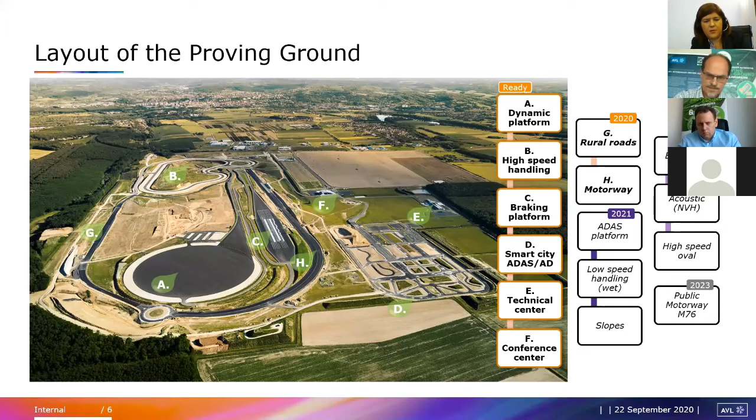This is also, I have to say, an older picture, newer than the other one. You can already see here in the field the ADAS surface, and more here the slopes. You can see more here within the high-speed handling, already the wet handling course, and also the bridge for crossing of the highways, also ready.

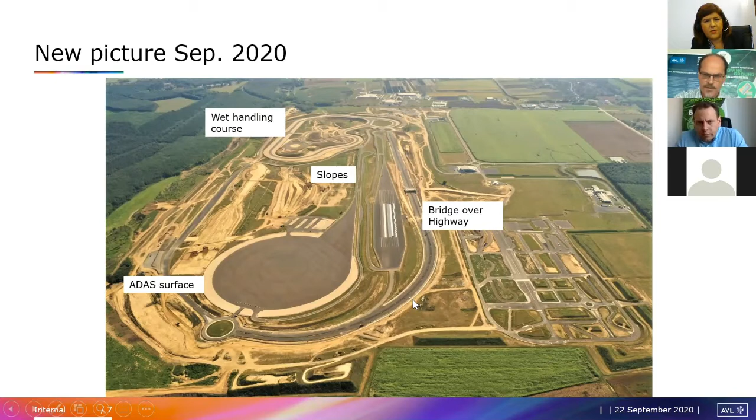Some more details, as I mentioned: the dynamic platform with 300 meter diameter, acceleration 760 meters. What is interesting on that platform is that on the return lane we have put some special markings, meaning you can make your real testing on the dynamic platform. If you still have some other testing to do, like lane keeping testing, you can do that on the normal return way, so you don't have to use a different module or section. You can do it within your test on the dynamic platform, going on the return lane, making lane keeping or lane changing and other testing as well.

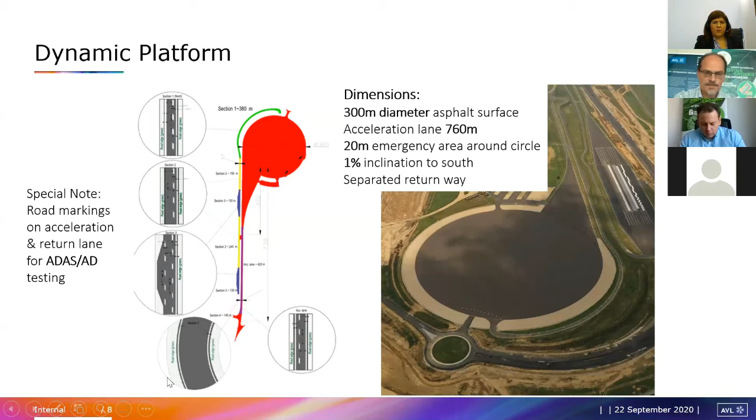This is the high-speed handling course, and you can see in the picture on the right side already the contours of the low-speed handling course as well. As I mentioned, 2 kilometers long, 2 kilometers and 40 meters to be exact, with a width of 12 meters, and on the right side 20 meters of gravel as a safety zone. Here you can also see the multi-lane section of 3 lanes, 450 meters long, also divided and marked with special markings.

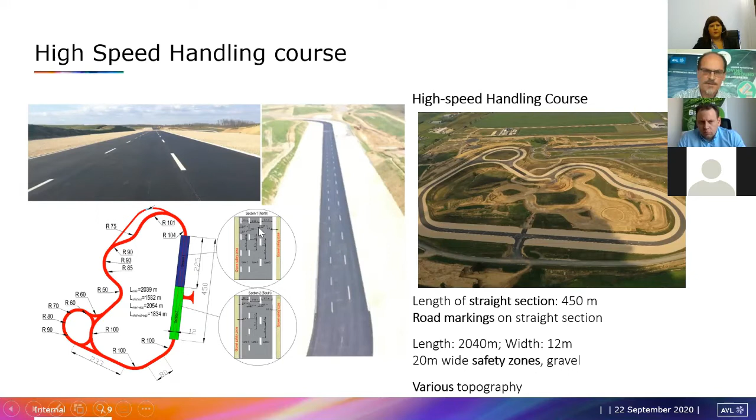Here's a marking of a motorway, and on the left side is a marking of a highway. This gives you a possibility to make platooning and other testing here on that module.

This is the brake measurement track. As I mentioned and you saw in the film, there are different surfaces, beginning with the chess surface, a normal asphalt with a mu of 1. Then we have the specialty of the low mu section built out of tiles, Japanese tiles, 10 by 10 centimeters, handmade, which gives a mu of 0.1, which is ice. Then next we have the blue basalt, which gives a mu of 0.3, also very close to ice. Then we have an asphalt mu 0.8 as a mu split, if you want to make some braking tests with a normal surface and the ice surface on different tires.

Then we have treated concrete of 0.6. We have another reserve surface still for mu split of 0.8, and on the right side we have our aquaplaning basin, which we can fill up to 5 centimeters with water. All of the surfaces have a length of 200 meters.

As I mentioned, 750 meters is the acceleration lane, and still at the end, if you cannot bring your car to stop, which in case of the low mu is very difficult, maybe for a passenger car they may stop the car. For commercial vehicles, buses and trucks, it's quite impossible if you have a speed up to 80 kilometers to stop on the 200 meters of the low mu surface. Therefore, we have at the end another 150 meters as a security zone.

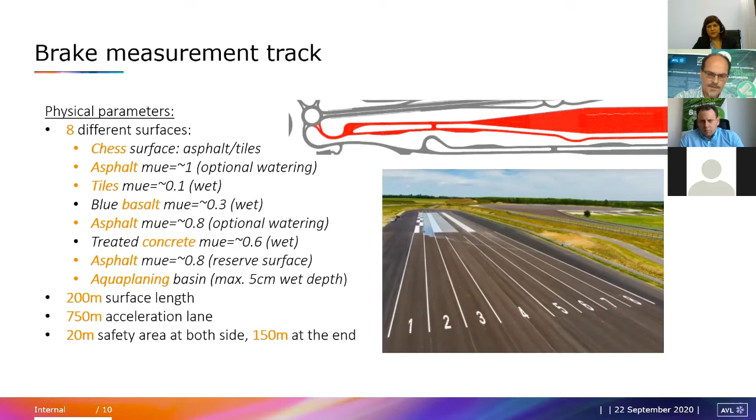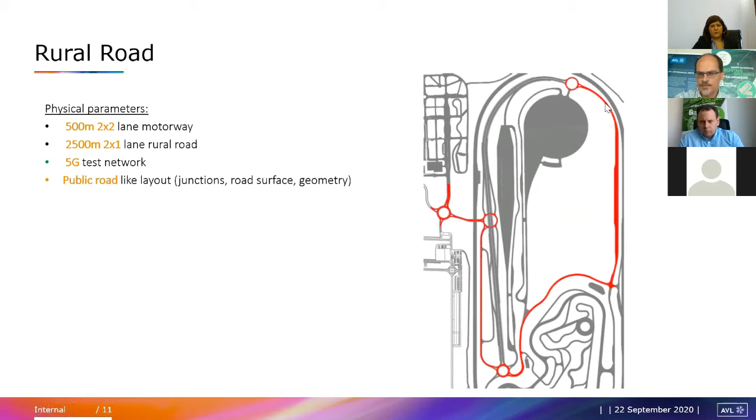This is, as I mentioned, our rural road system. It has two functions. One is to combine the modules, meaning if you come here from the technical building on the left side, crossing the motorway, you can decide to go on the motorway directly, or pass only the motorway and go to the modules like the high-speed handling course, the braking platform, or the dynamic platform, or use the rural road as a cycle course. So you can start here, go to the highway, go to the round corner, and get back on the rural road and have a circle of different scenarios.

This is our smart city, and as I mentioned, this is the biggest smart city in Europe. There is no other proving ground, no other smart city of that size in Europe. The next one is in Asia and in America. It's divided into 5 different sections.

The first section is the low speed parking area, where we really have some low speed tests with a parking area and a logistic yard. Then we have a multi-lane high-speed area, the second area. It's a 2 times 2 lanes section, where you can have within the city the high-speed test, which means up to 70 kilometers per hour.

Then we have our downtown area. It's section 3, where we will build, mid of next year, some building facades out of glass, stone, and iron, 10 meters high, as I mentioned. And then we have a suburban area with different road sections, with also a small hill inside.

And then we have the T-junction area. It's a normal outside-city area with very straight roads, with several functions also on the road itself, some parking areas, some bus stops direct or next by to the road, to simulate all the kinds of scenarios you may have in the city and outer city.

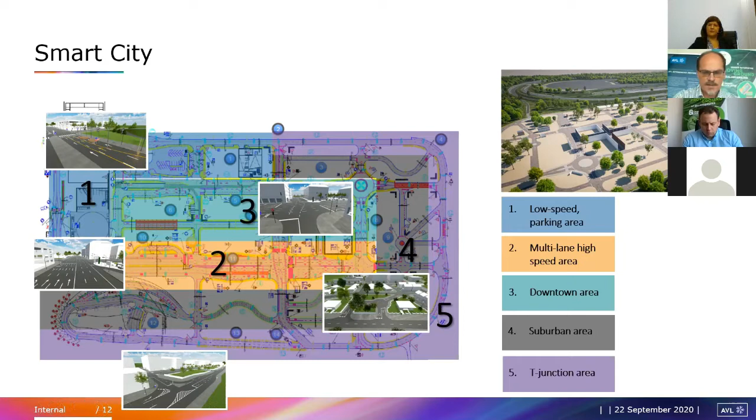That was the vision in 2014, and right now we are here. So once the buildings stand here in the downtown area, I think we will have quite the perfect copy of the vision.

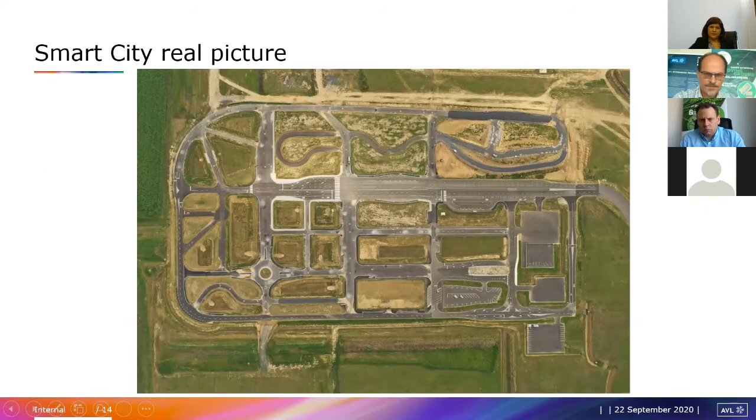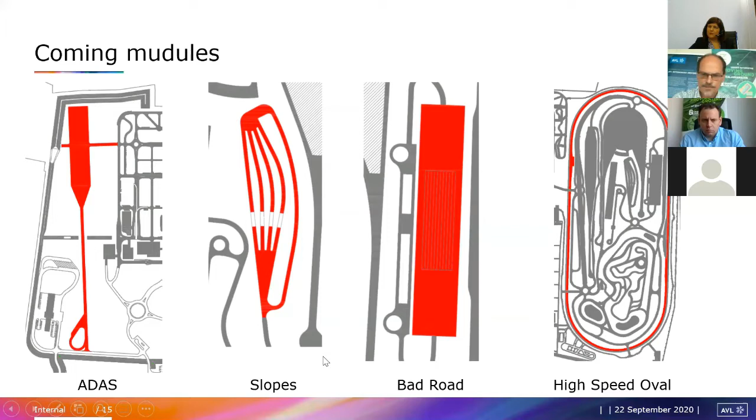You can move your real car in the smart city, and then input into the software that a bicycle is crossing the street, and the car will stop automatically. In real life, you will only see there is a car, there is no other target, and the car stops, because the software is simulating that a bicycle may be crossing the street, but you will not see it - the car will recognize that, and you can simulate that.

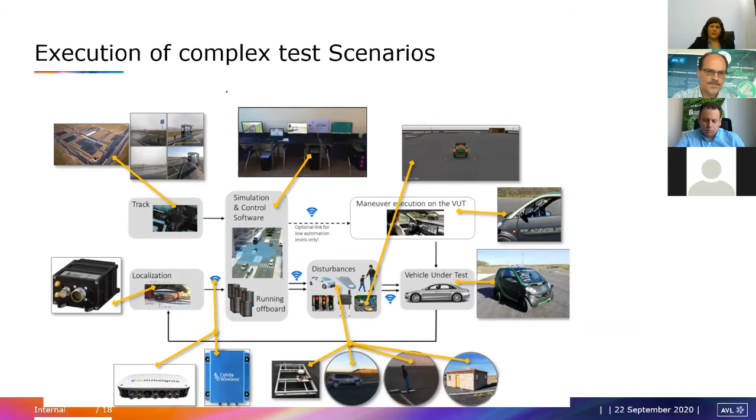These are the software we are using right now to handle all these scenarios and cases.

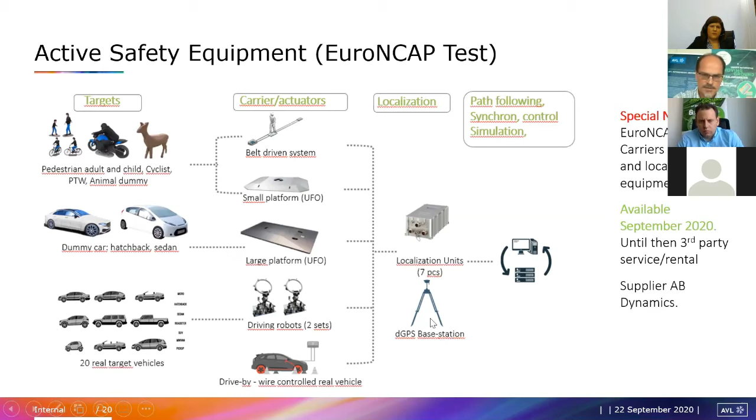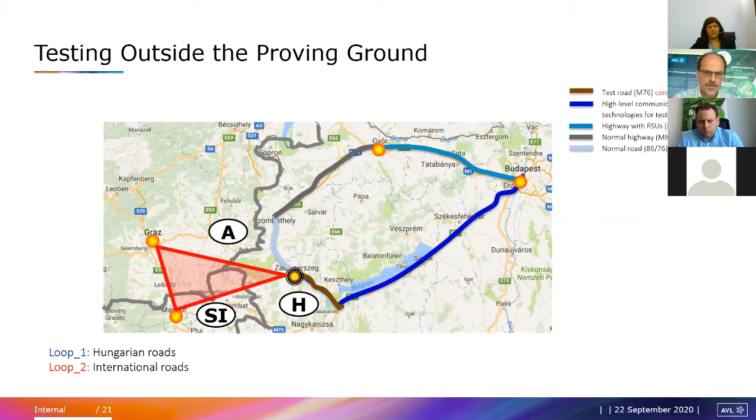As I mentioned, testing outside the proving ground is also possible. We have here a trilateral cooperation with Austria, Slovenia, and Hungary for autonomous driving crossing the border - what will happen within the car, the time crossing the border, when it will recognize the new systems, the new telecommunication, how the car will react, and is it able to react in time. It's also a topic Viktor can explain in more detail.

What I also said, we have the possibility in Hungary since April 2017 to make testing on our road network in Hungary, which means you can test your prototype cars and autonomous cars up to level 4 on the complete road network in Hungary without any time restriction, any territorial restriction. This means you can go within any city and on any street and make your level 4 testing.

For sure, there were some requirements you have to fulfill. Once they are fulfilled, you can have this permission and can go and test on the total road network.

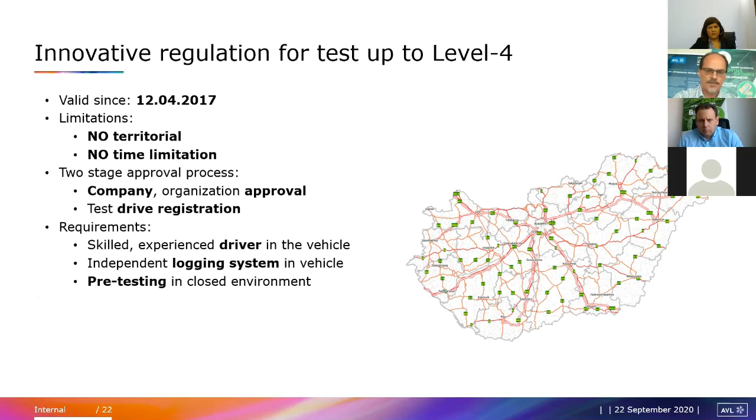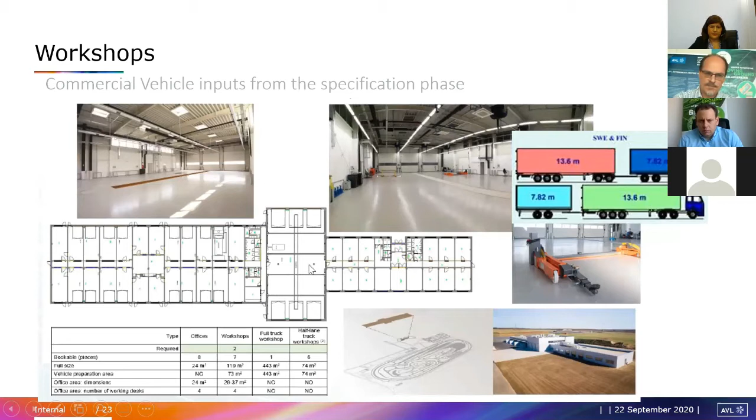These are our workshops. Also already seen in the film, we have 8 workshops for passenger cars. One workshop can fit up to 2 passenger cars with a separate office next by, with space for 6 to 8 people. We have the big garage workshop for our trucks and buses, and we have some offices which we can also provide to our customers.

As we are not only a proving ground for passenger cars, we also have the possibilities to let in here commercial vehicles, which means trucks, buses, and that kind of categories.

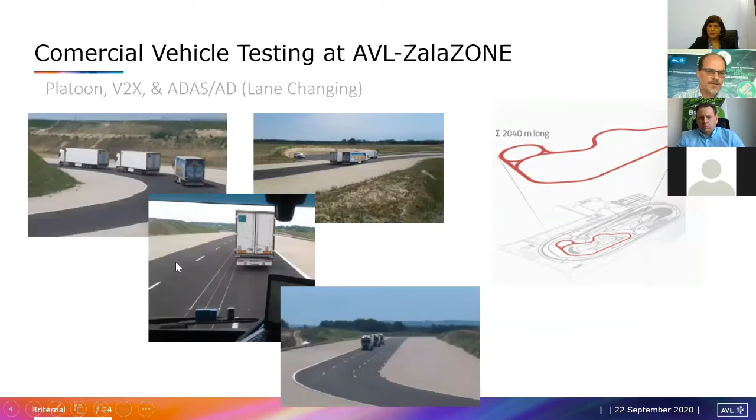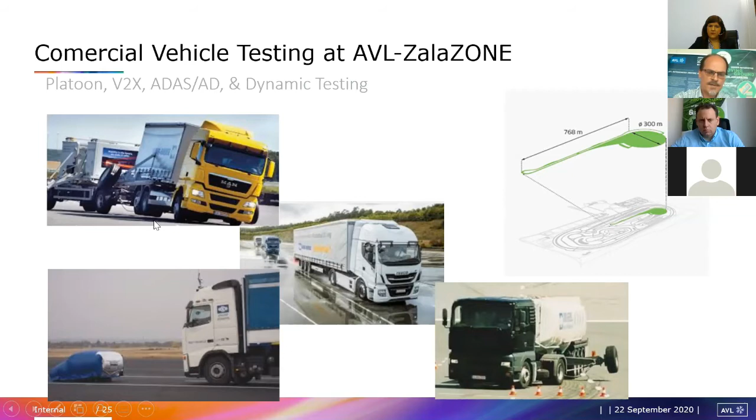This is an example of what can be tested on the high-speed handling course, because even though it's for high-speed, it also fits commercial vehicles for platooning and lane changing scenarios. The dynamic platform is also very specialized for commercial vehicles to do platooning and some dynamic testing, and some other testing as well.

Also in the smart city, as we have a logistic yard, we have the possibility for autonomous driving commercial vehicles to test. As you saw also in the vehicle for some ADAS testing, it means pedestrians crossing the streets and the system has to react, or normal parking situations for autonomous commercial vehicles as well.

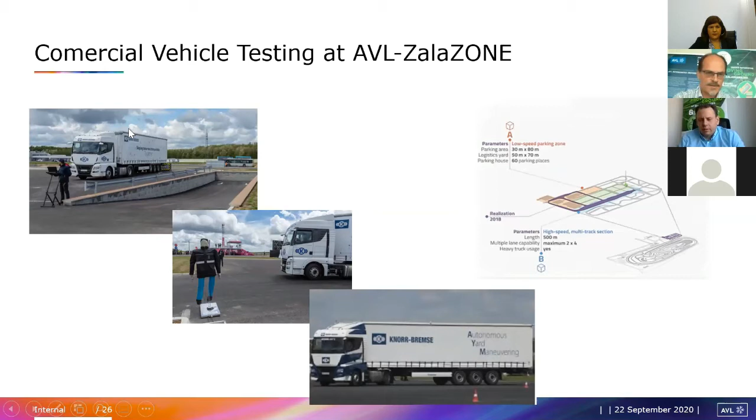Then we have the possibility, and this is the part I only wanted to mention in one slide, of Dr. Háry András. It's our science technology park, which gives a very good possibility for our customers, new customers, who can have their own small office and workshop directly in connection to the proving ground. This means they can have here a kind of research and development center, a small workshop, which gives them the possibility to develop their car, make some modifications, and within 20 meters they're already in the proving ground going out for testing anytime they want. This is a very good possibility, which right now I cannot remember any other proving ground providing in that closeness to the proving ground itself.

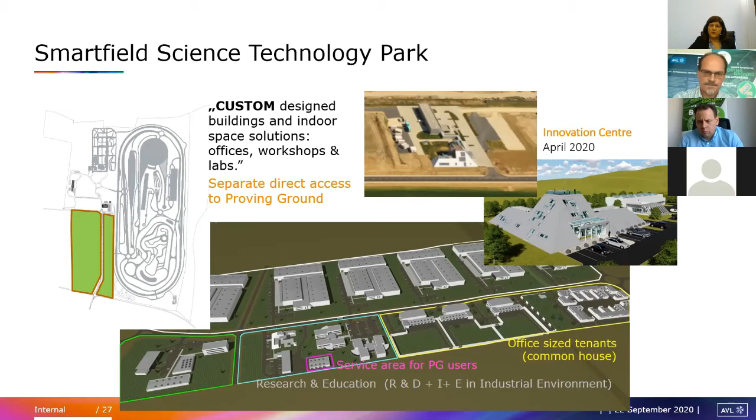That was very, very fast. I hope I wasn't too compressed, but I think that was the time I had, and hopefully a lot of questions will arise, and hopefully I can answer them as well.

So let's start with the topics. I would like to provide you a small overview about our major focus points. First of all, cutting edge research is the most important from our side, of course. Then we are also focusing on education, I would say future-proof, I'll talk a little about that later on. Dissemination of results is also a very important part, and finally the knowledge transfer.

Let's check inside ZalaZONE where we are located currently. As you can see on the bottom left side of the overall proving ground, we have currently a built-up research and technology center, which is continuously improving. We will have new buildings, but Dr. Háry will speak about this, I'm absolutely sure.

Therefore I'll skip this topic now, but we currently have 3 universities who are hiring offices and workshops nearby ZalaZONE, and 1 research institute. I'm really proud to tell you that we, from the research and universities part, have a small proving ground at the area. If you see my pointer, it is located here at the bottom side of the big proving ground, which can be used for dedicated research activities.

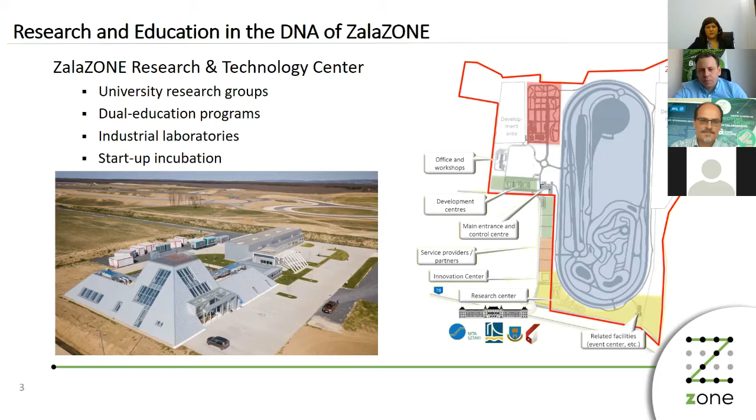Regarding the education dedicated to the ZalaZONE activities, 2 years ago we initiated a new master program at the Technical University of Budapest called Autonomous Vehicle Control Engineer, in English language, and we are expecting students from worldwide. This is a very special master program because it focuses really on automated vehicle related topics, and we cover practically all those topics relevant for CCAM related science.

We also have another one, Computer Science for Autonomous Systems, at another university in Budapest, and we have started as well a new program called B-Prof, which is a little bit less than a bachelor, focusing on vehicle testing. Students who choose this education form will be able to support the testing of vehicles on a proving ground, for example.

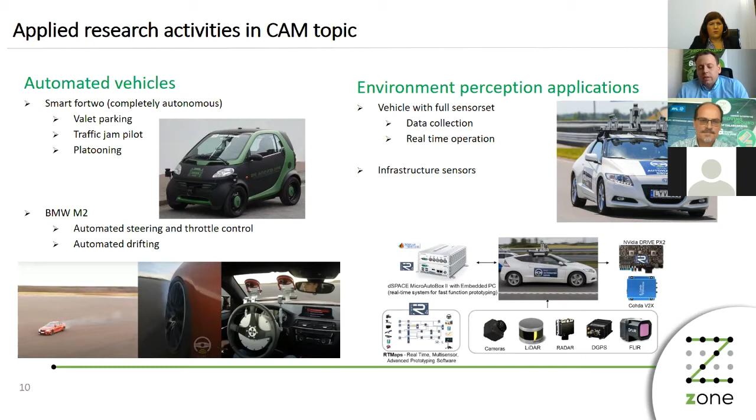We are not only focusing on perception from the vehicle side, but we are focusing currently as well on the infrastructure side. I will talk a little bit about that later.

Another very important thing is that from the research point of view, we are doing special testing methodology research. One of them is the so-called vehicle-in-the-loop methodology, where we combine our simulation technologies with real vehicle testing, practically bypassing the perception system with a virtual world during vehicle testing. From that virtual world, running in real time in parallel, we are able to inject back to the vehicle at the object level, or currently even at the raw sensor data level, information into the automated vehicle system.

We have an even more complex testing methodology that we call scenario-in-the-loop methodology, where we are doing the same.

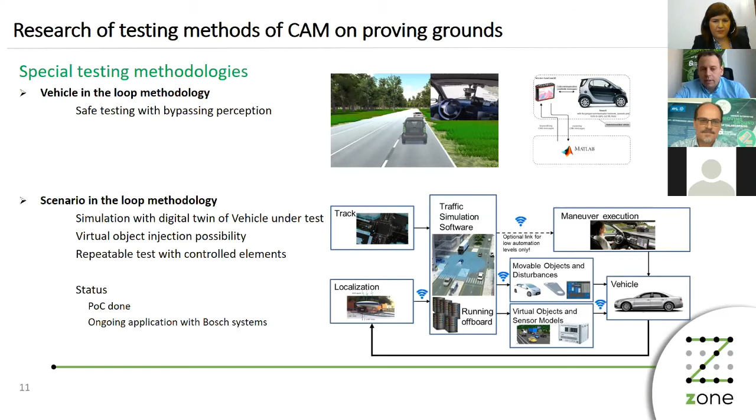With the real vehicle testing in parallel, we are running a simulation in real time, where we are capable of vehicle-in-the-loop object level or sensor level information injection back to the vehicle. From the simulation server, we are also able to control real proving ground elements, for example dummies, pedestrian dummies, or even moving platforms or target vehicles. The current status is that we have done a POC and we have an ongoing application with Bosch on this system.

Last but not least, a new topic we are focusing on is research on a complex cloud-based central system, where our target is to build a real copy, a so-called dynamic map, of the environment in real time of the road users, with real-time object information in the cloud that can be used for providing information back to the vehicle, for automated vehicle testing, and also for example data for accident reconstruction and support of the previously mentioned scenario-in-the-loop system. In this project, our partners are Knorr-Bremse, Hungarian Public Roads, Ericsson Telecom, and some Austrian partners as well.

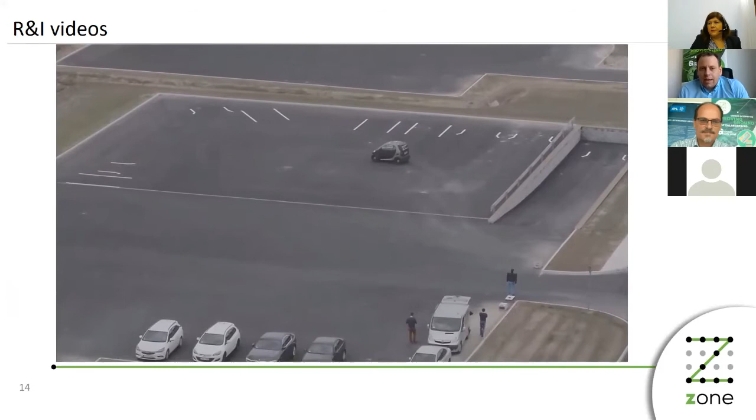Finally, just some highlights: out of the theory I mentioned, you can see some videos of what we are doing. In this one, you can see our automated vehicle doing a valet parking application, and we are doing a parallel real-time simulation at the same time.

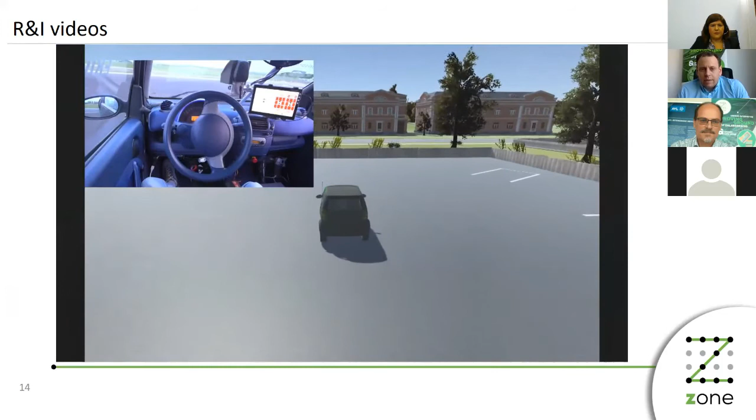You will see the simulated environment soon, and you can see that the vehicle in the simulation is acting in the same way as in the real world. Now a virtual pedestrian comes in and the vehicle started to brake.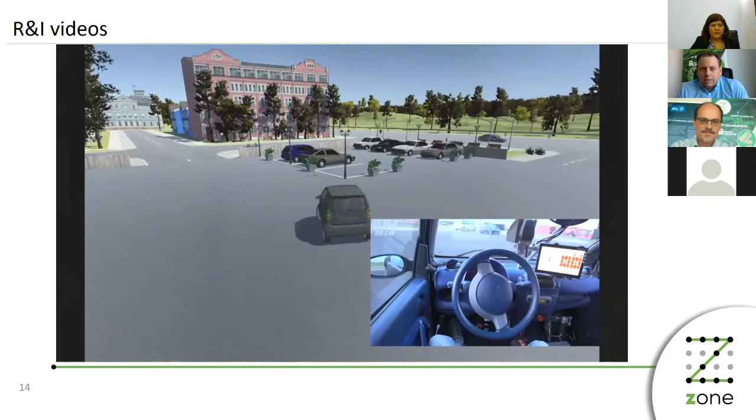In the next scenario, you can see that from the simulation server we will control our real test dummy in the proving ground, with a time-to-collision calculation, to come in front of the real vehicle.

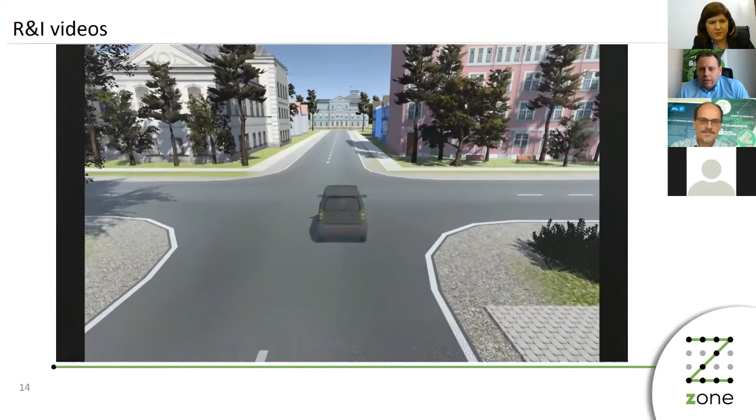This was our next scenario. Here, my colleague will drive the vehicle to the next scenario.

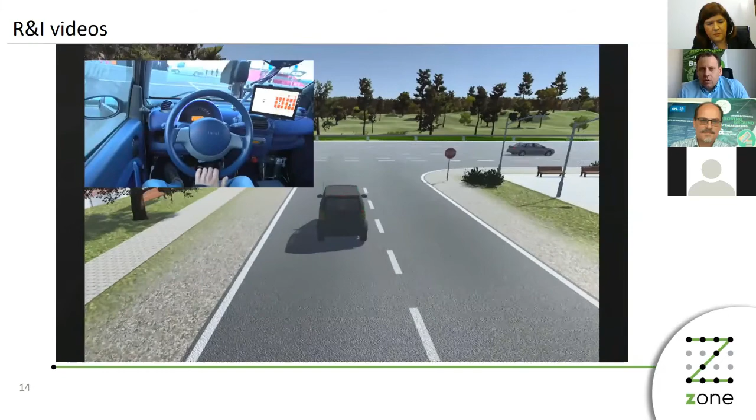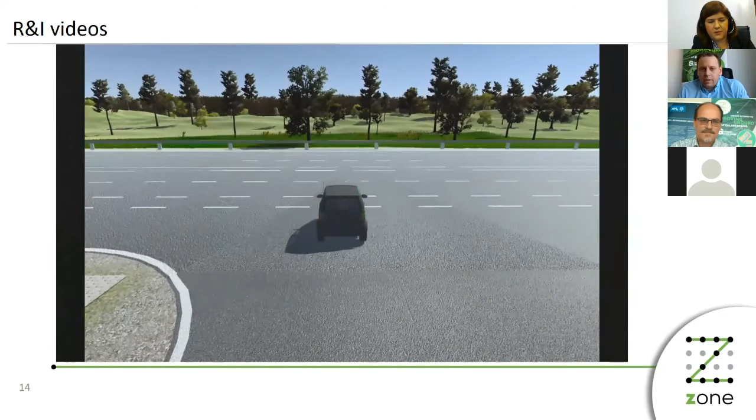But I can also tell you that in this video, which we recorded, this was done not with an internal computer inside the vehicle, but the computer was an external server that ran the simulation, and the communication was real-time 5G communication that was implemented in the ZalaZONE proving ground last year.

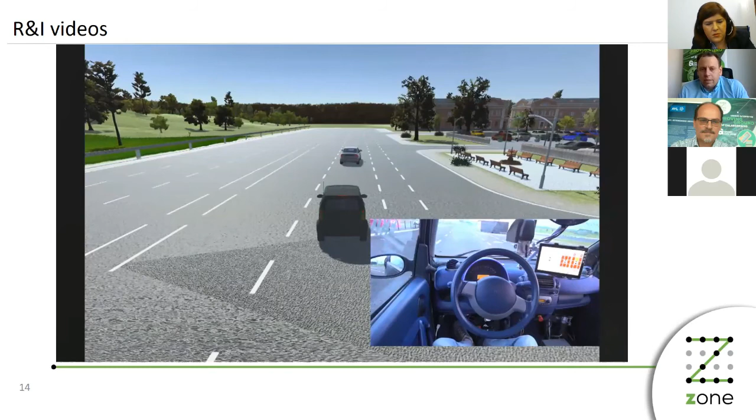This was done in 2019, May, where the proving ground opening scenario took place. Here you can see the next scenario is a traffic jam pilot, where our vehicle reacts to the simulated front vehicle in the same way as it would if it existed there.

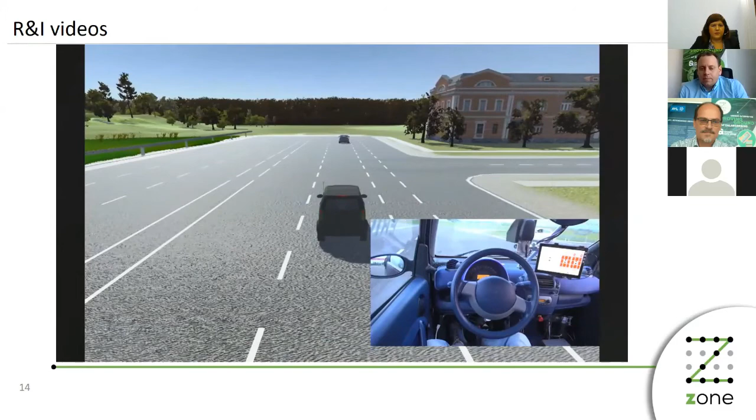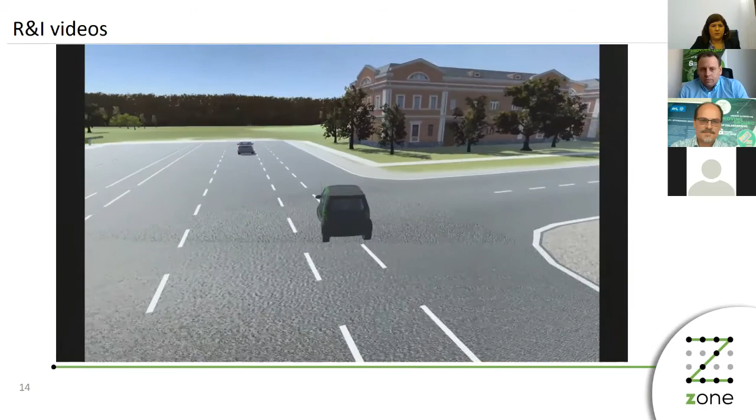Then the final scenario is coming, and my colleague will change direction, and we will do the same with the real vehicle. You can see that the Skoda vehicle will come in front of our Smart, and it will do the same traffic jam pilot with an automated lane change at the end of the scenario.

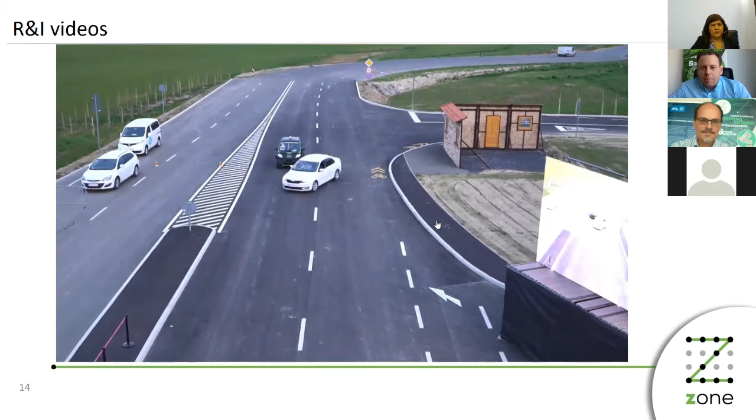During the event, we were applying a very huge LED wall, which you can see on the right side, and the audience was able to see the parallel running simulation in real time from the demo location.

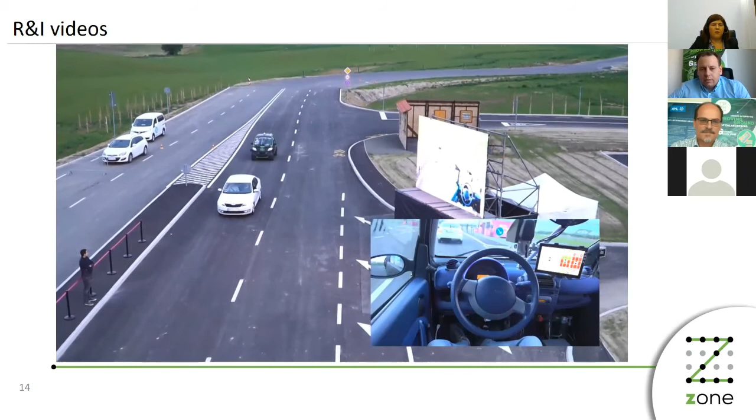So then the final scenario is starting. You can see that the vehicle will do the same traffic jam pilot functionality, and my colleague will push the turning indicator, and it will react with a complete automated lane change operation, finally.

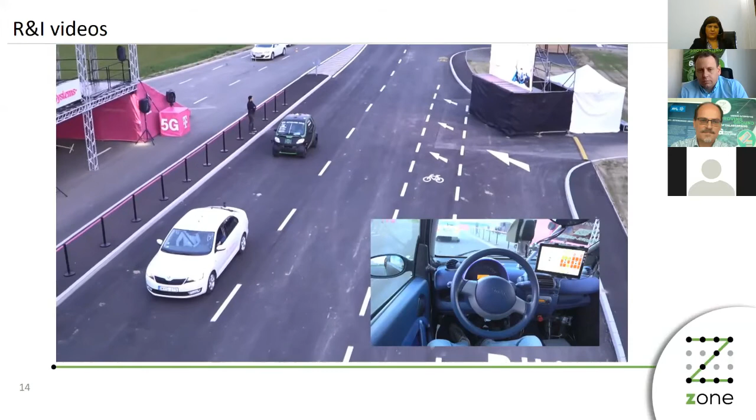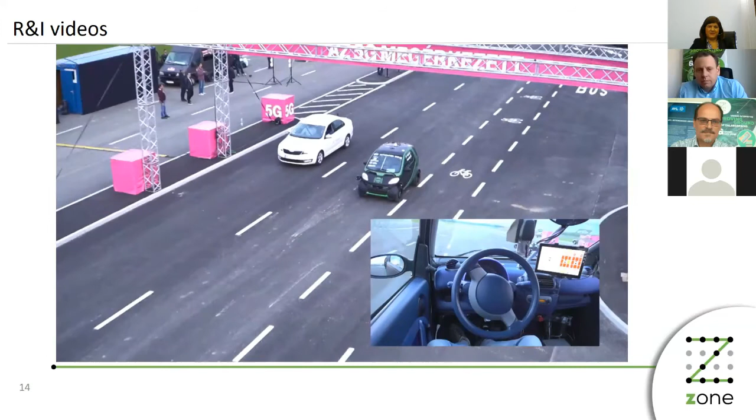So actually, this was the final scenario here, and then practically this demo ended.

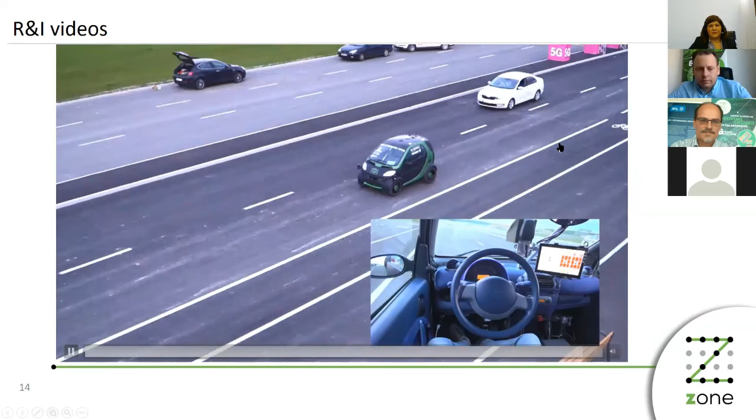Our next target is to realize not only the stable drifting, but also to implement a predefined trajectory with the vehicle.

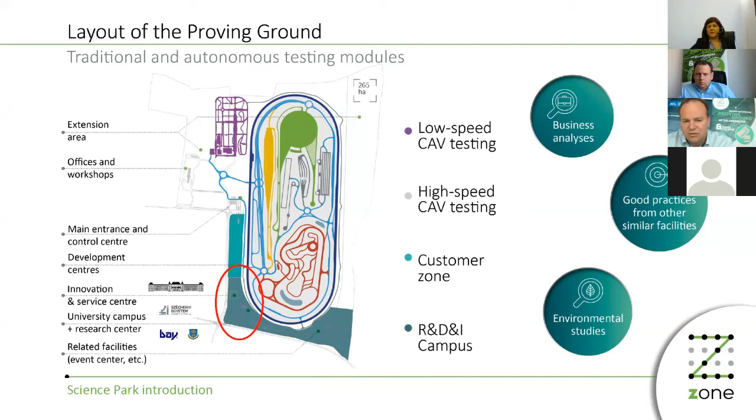So those customers who are permanent users of the proving ground, they have the opportunity. It's more economical for them to establish a local development center. There's also a dedicated zone for this. We heard just recently that the customers and the companies are the key users of the proving ground, and also R&D institutions, of course. So that's also the reason why this kind of integrated layout includes zones for both companies.

The proving ground is operated in a kind of rental model, so companies can come here, they rent a module for an hour, for a day, for a week, they can go home. But some companies are the constant users, and if they use the modules for a lot of time during the year, then it's better for them to establish a local site.

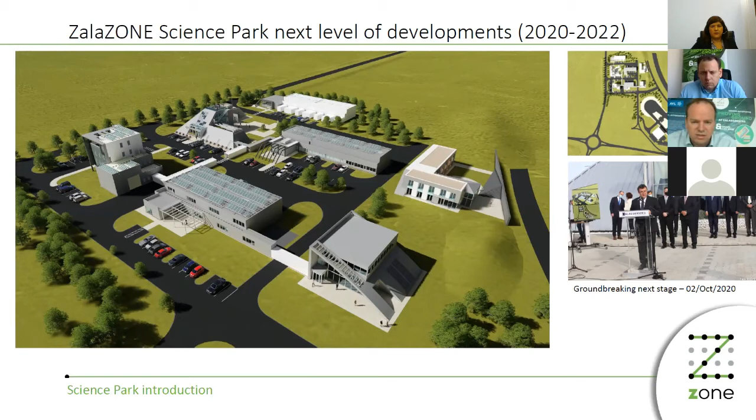This pyramid-shaped building and the workshop next to it are already full, so that's why we have launched the development of the next buildings of the science park. This is a vision, and the groundbreaking of this next stage was in October this year. By early '22, these buildings will be built, and further laboratories will be created.

This chain is usable, and the people, companies, and university groups here at ZalaZONE can make R&D projects and offer services for industrial partners - or those industrial partners who are clients of the proving ground, but not exclusively. It's also a key point that the R&D partners and technology service providers here can work anywhere in the world and also cooperate with companies from other countries.

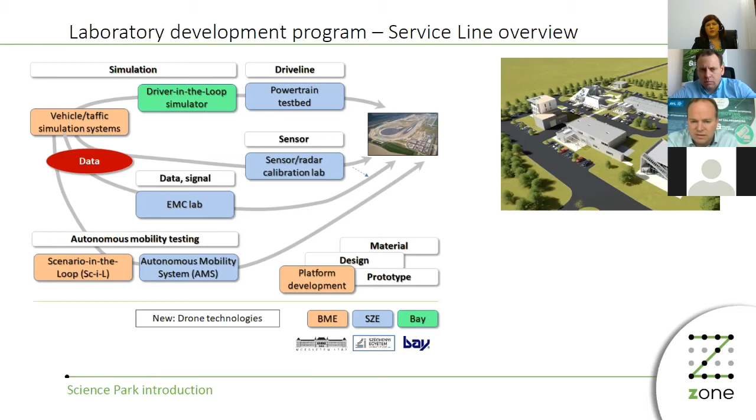Sensor, radar, it's also a key line, data, and of course autonomous mobility testing, and there are also the classic fields. The service available now - as was mentioned by Viktor - the local team has knowledge of the most frequently used traffic simulation software, and in cooperation with the proving ground, this group can offer simulation services. The background scientific knowledge is given to this team by the Budapest University team.

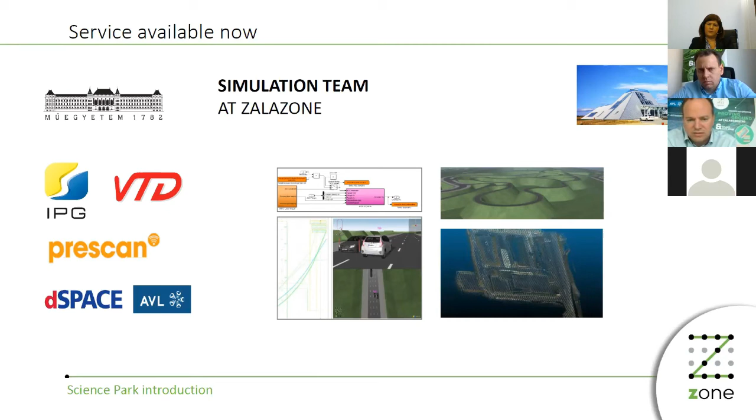So this is a cooperation of the Budapest team, the local R&D team, and the proving ground, and these services are already available. In the next stage, the István Széchenyi University will establish 3 laboratories: a powertrain testbed dyno to examine and analyze powertrain features, and also a sensor, camera, and radar calibration laboratory. This equipment is under purchasing, and the building I showed before is also under construction.

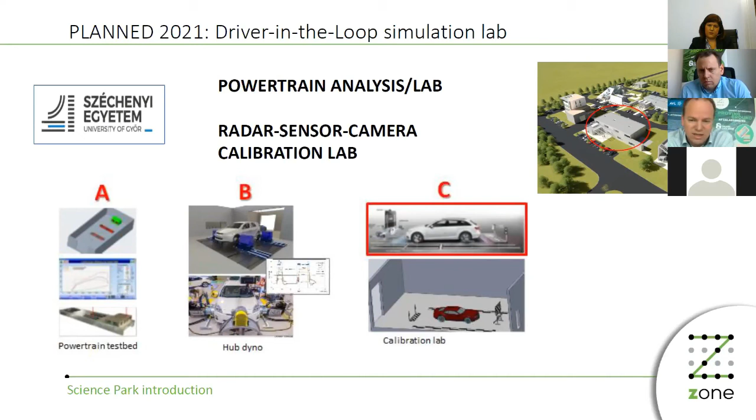By the end of next year, this laboratory will be available, and by early '22 there will be a special so-called driver-in-the-loop simulator, by the Zoltán Bay Institute. This equipment is also under purchasing, but the throughput time is quite long for such a complex system. It gives the opportunity for real emotion simulations.

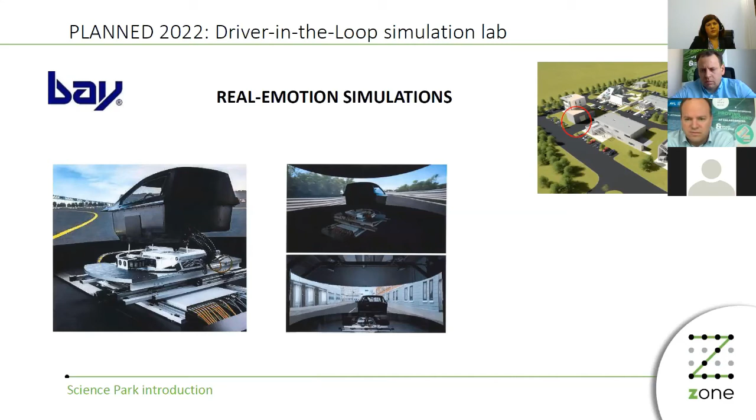This is how the science park laboratories next to the proving ground are, and will be further developed in the future. And this is my last slide - of course human resources are key for all this kind of activity. That's why in these science park buildings we also give jobs to dual and trainee students. We have around 1,000 engineering candidates from various universities, and after graduation these students can stay working under a normal working contract, getting a job either from the proving ground operation company, or by industrial companies who create their local site, or by R&D.

It's very important to ensure the continuous flow of resources. So very briefly, this is the science park concept, how we approach and try to create and build up the local environment for this kind of added value activities. Thank you very much, and if there are questions, I am glad to answer.